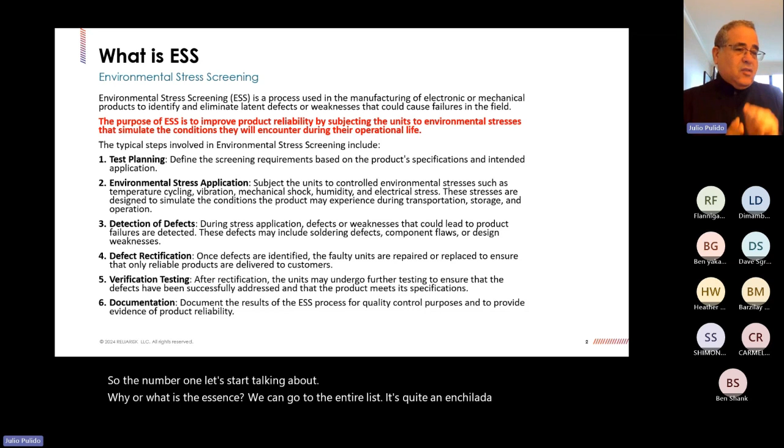So number one, let's start talking about why, or what is ESS. We can go through the entire list. It's quite an enchilada, it's 6 points. But the purpose of ESS is about improving product reliability. And why you do it, that's the main thing. You want to improve the product reliability.

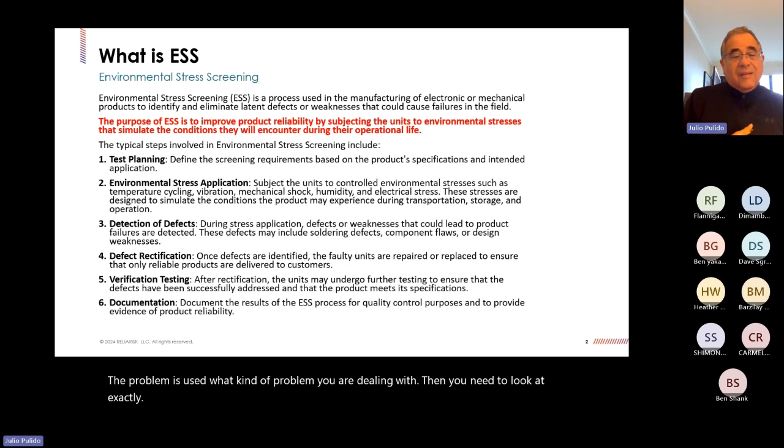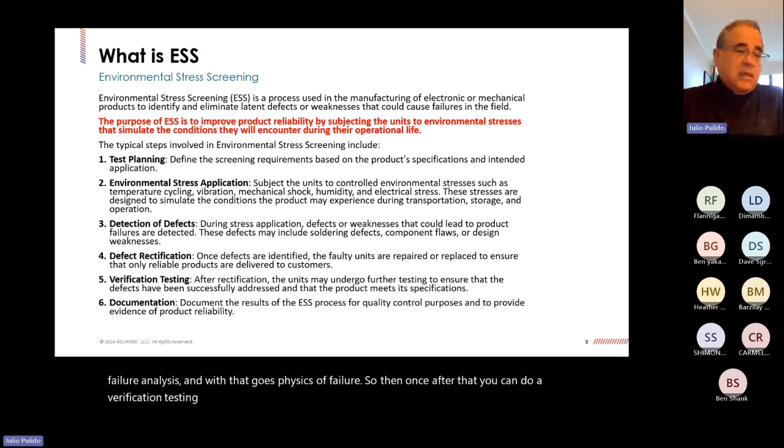So you will say, okay, reliability has to do with long term. That's correct. But it also affects you depending on how the product is used, what kind of product you are dealing with. Then you need to look at exactly if ESS is necessary for you or not. But it involves planning, environmental testing or applications, failure analysis, and with that goes physics of failure. Then after that, you can do verification testing, documentation, and traceability as part of quality assurance.

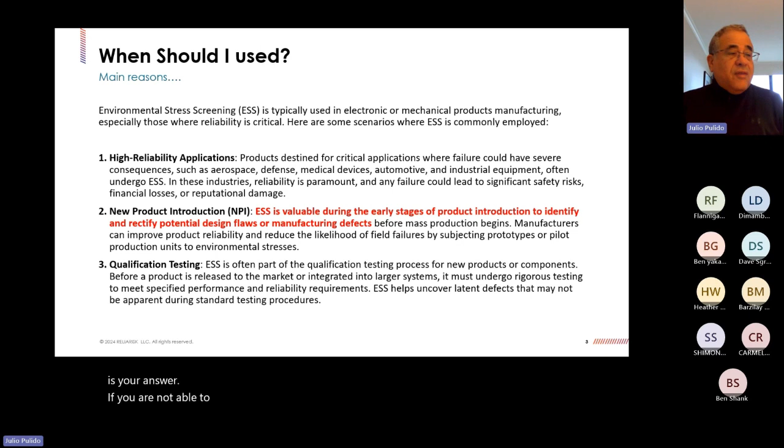And also other main reasons, right? What should we use it for? Why? So now that we know what ESS is, when should you use it, when is it really necessary? If you have high reliability applications from the get-go, or your industry requires a high level of performance in terms of low failure rate, this is your answer. If you are not able to eliminate all the failure mechanisms, or some failure mechanisms, and you cannot control it well in your process, that's why.

And it's part of the NPI, your new product introduction. It is really a good tool when you are going to market. Why? Because you demonstrate that your line, you understand what you want, what is your failure rate that you want at the beginning, and we can talk about it. But the important part is that you can assess that in a more quantifiable way.

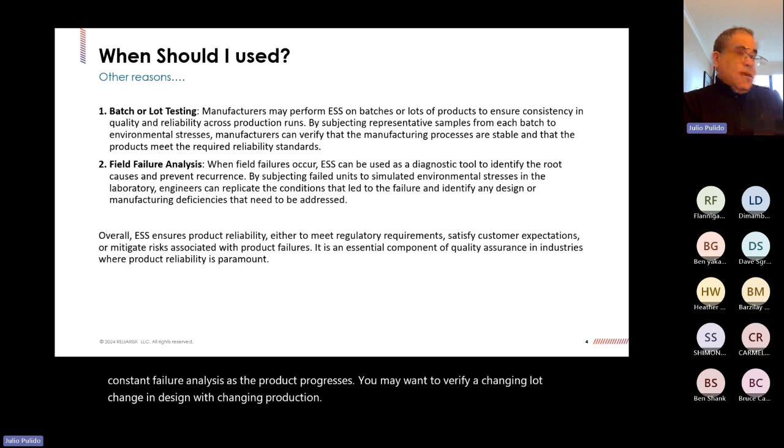Other reasons could be that you decide to test for batch. It could be that you're doing a constant failure analysis as the product progresses. You may want to verify a change in lot, change in design, or a change in production location. That's when you start doing that. So all these things is when you should do it, but at the end of the day, how you should do it is what we're gonna be talking about. Because the how will give you the ability to be effective and be able to quantify your risk in the long term.

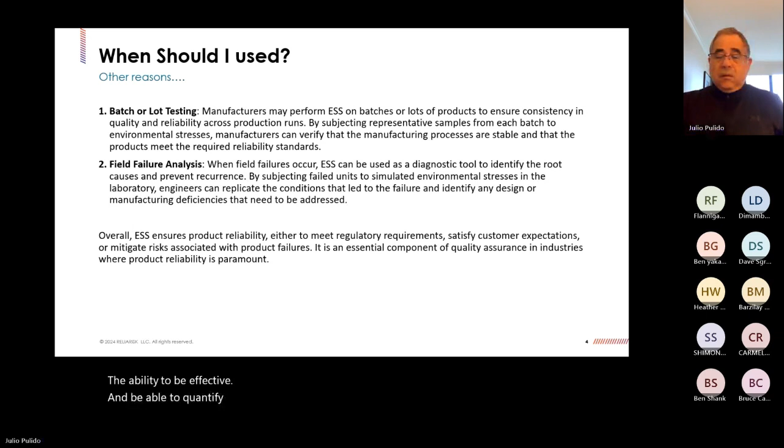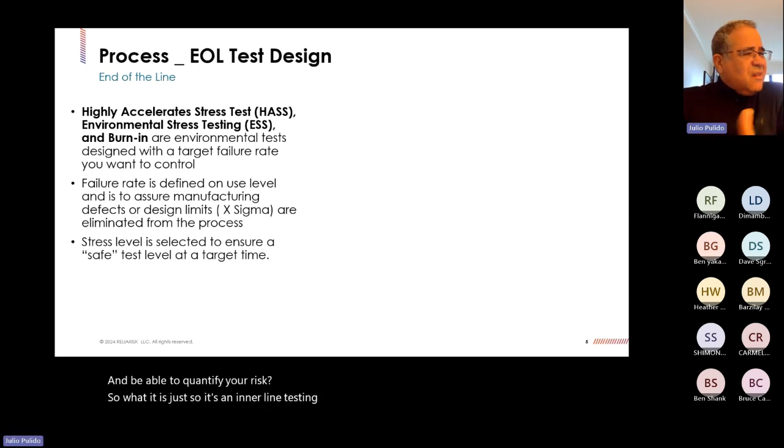So what it is, it's an end-of-line testing. ESS is kind of end-of-line testing, so people will think about it. So you notice I mentioned failure rate. Imagine you have a failure rate, you understand what that failure rate is. And by the way, ESS is just one more of the things people use. Burn-in, HASS, stress screening, all of them use the same methodologies with small variations. In some you have 2 or 3 factors coming into play, but it's almost the same principle. All of them are the same principle.

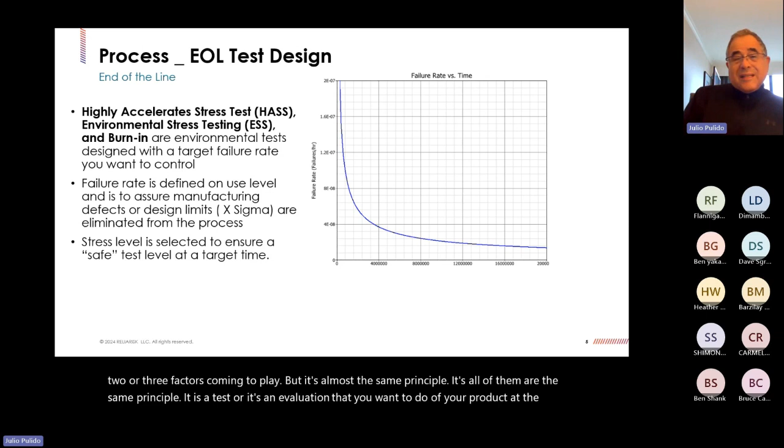It is a test or an evaluation that you want to do of your product at the component or system, subsystem level. Let me repeat that - at the component or system, subsystem level. And then you say, hey, I want to control this certain failure rate, and you have a failure rate over time, like something in this arena. And you decide that you want to control it at that level. There we go, that's the line.

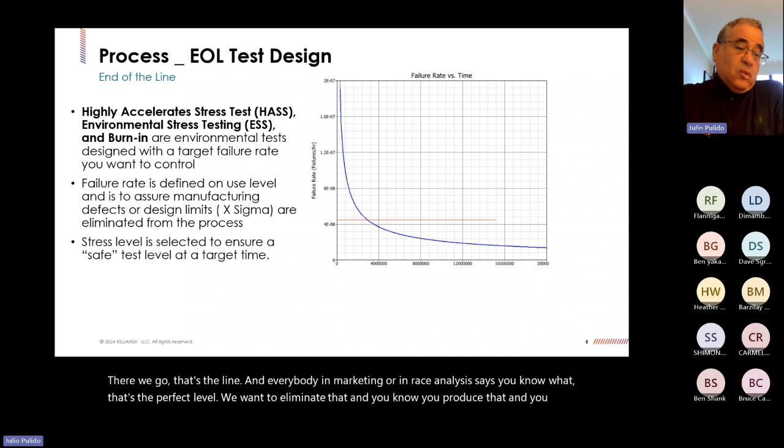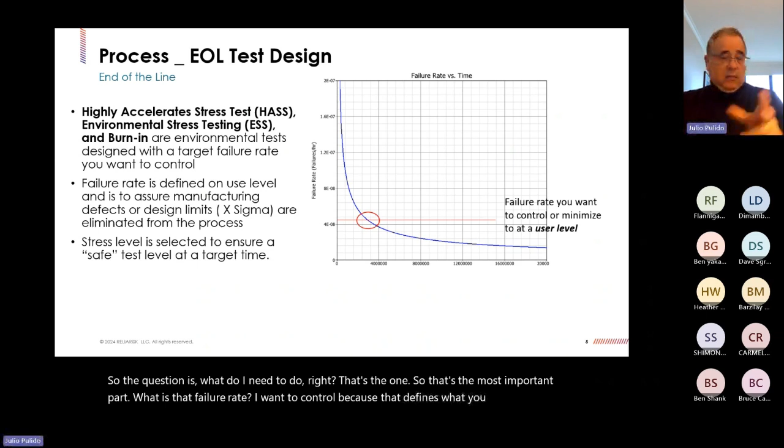And everybody in marketing or in risk analysis says, you know what, that's the perfect level, we want to eliminate that. And you know you produce that, and you know you need to eliminate it because you don't want customers to potentially get that. You want lower failure rates potentially in the field. So the question is, what do I need to do? That's the one, that's the most important part. What is that failure rate I want to control? Because that defines what you have. Or you can do that in different ways, and we're going to cover that in this conversation.

So in different terms, we talk about the whys, the what, and the how. So we need to talk now about the how, how you're gonna go about it. I need to reduce and eliminate and control that failure rate right there in our previous conversation. But how are you gonna do it?

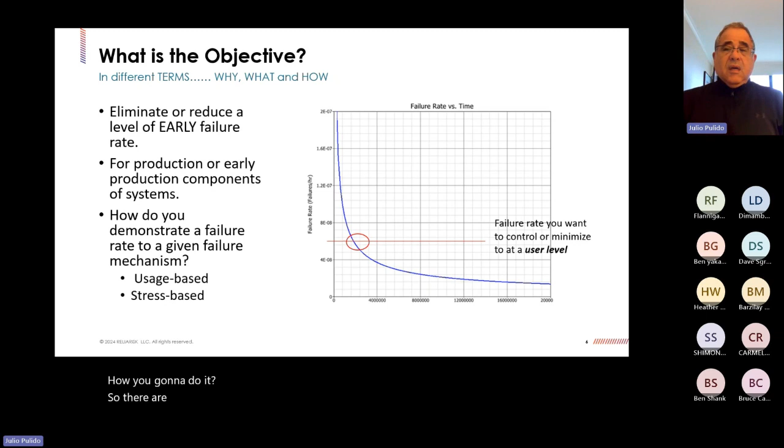So there are different ways to do it, quantitative ways or qualitative ways. Qualitative ways, I'm just gonna share this with you. It's not the subject of this conversation, but it could be someone saying, well, I'm looking for 300 degrees temperature.

We put it to test. Anything that fails on that, it's no good. We let it pass because we decided that in a room, and we thought, over the years I have experience, I have 50 years experience, God.

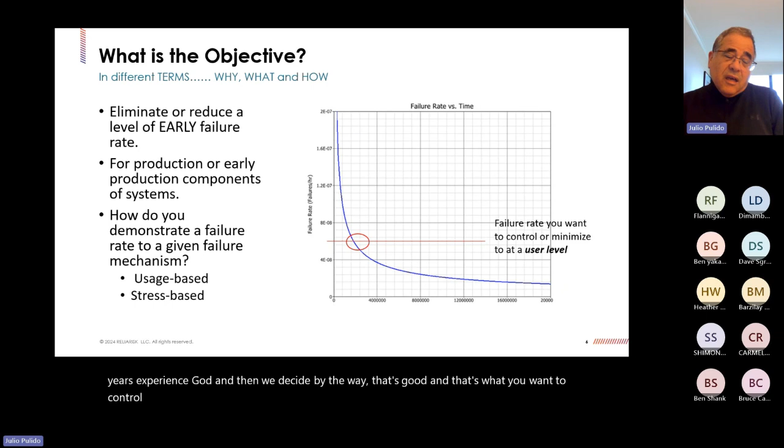And then we decide, by the way, that's good. And that's what you want to control. And that's okay if your organization is willing to do it. The only question with that, someone may ask you, what does that represent in the field?

You don't have the answer. Someone may ask you, how does that affect the performance of this component in the field? Well, we never had the problem, so we don't know. So that could be an answer, right? There are answers for everything. But that's not the right way to go.

The right way to go is you are able to determine, yes, I'm eliminating a certain percentage of the life, and we will cover that in today's presentation. But also at the same time, I know what is the stress level that I want to test, for how many cycles I should do that, and I know I'm catching something. I know I'm eliminating that high failure rate that we see from the beginning.

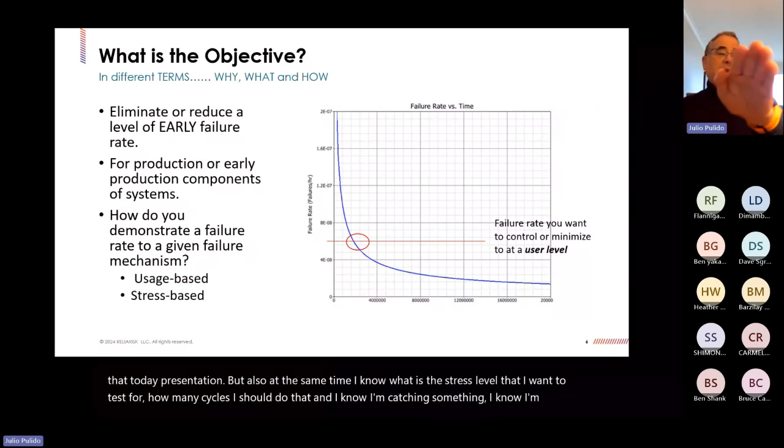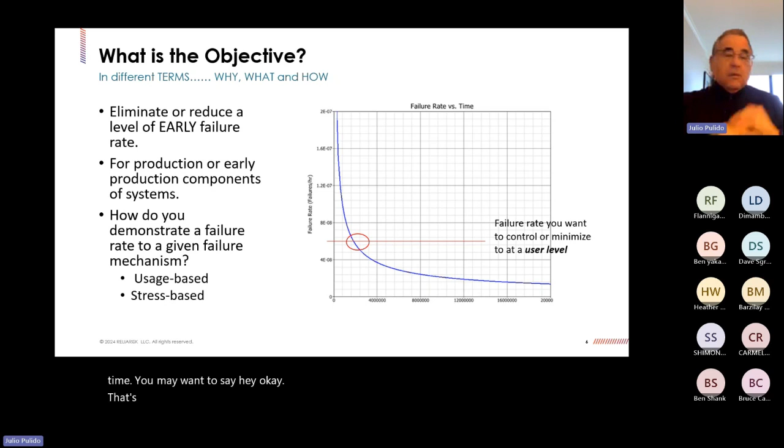And again, it's usually done when you want to eliminate high failure rates from the beginning. Imagine you have your failure rate inverse, and then you have a low and then increasing over time. You may want to say, hey, okay, that's okay. And then I can do it just to make sure that I am at that failure rate, again, right?

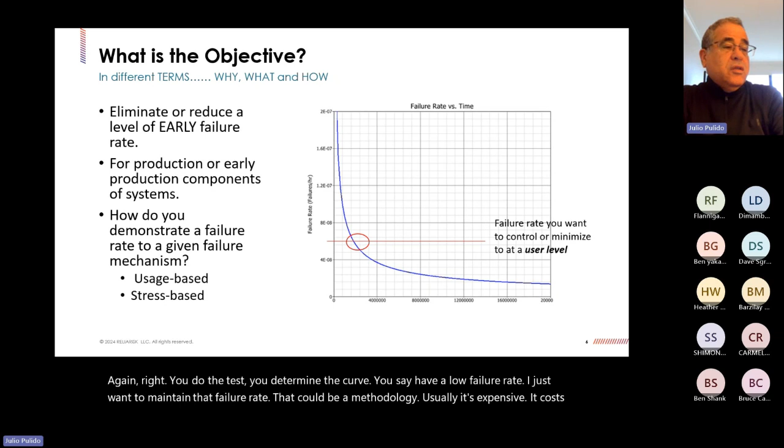You do the test, you determine the curve, you say I have a low failure rate, I just want to maintain that failure rate. That could be a methodology. Usually it's expensive, it costs, but for example in medical industry or pharmaceutical industry it may be important because you want to make sure that you have evidence that you did not produce something that is questionable.

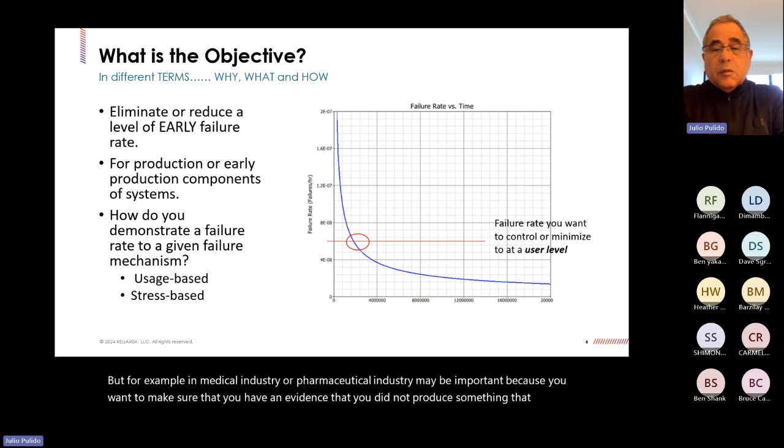So with that said, let's talk about reliability testing. Reliability demonstration starts by understanding how the product is used in the field. You can use standards, but standards don't tell you about reliability. They were designed by committees.

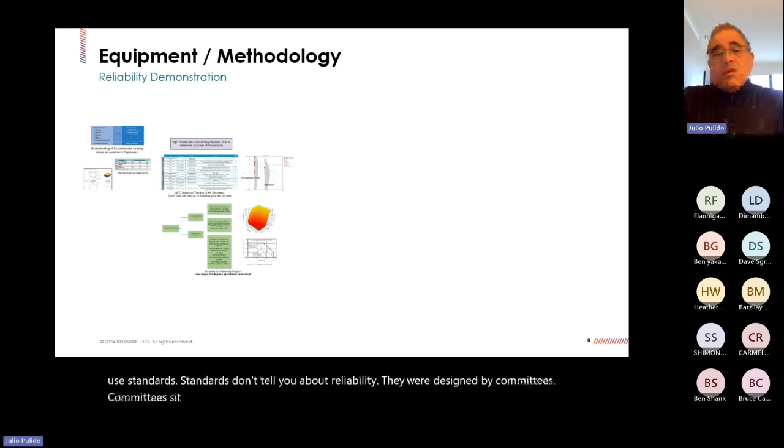Committees sit down in a room and say, well, based on our experience, X, Y, Z, tested to this, and that should be okay. There is more that goes into that committee generation, but in general it's usually between people that perform some kind of job in the area, understand the area, and given the experience, they are suggesting that. It's a good method, but it's not the method.

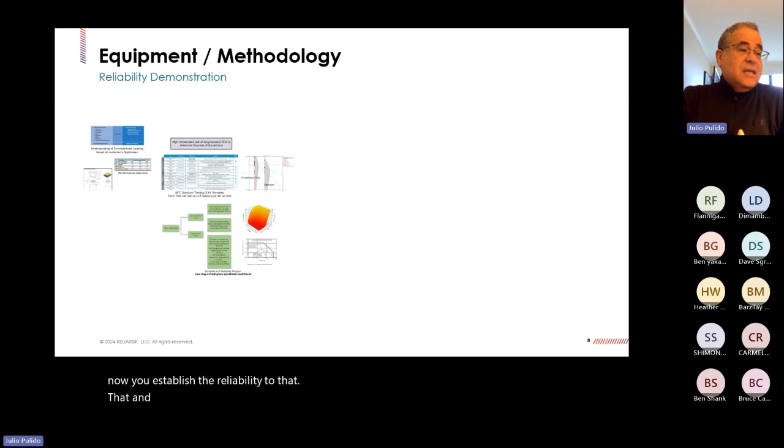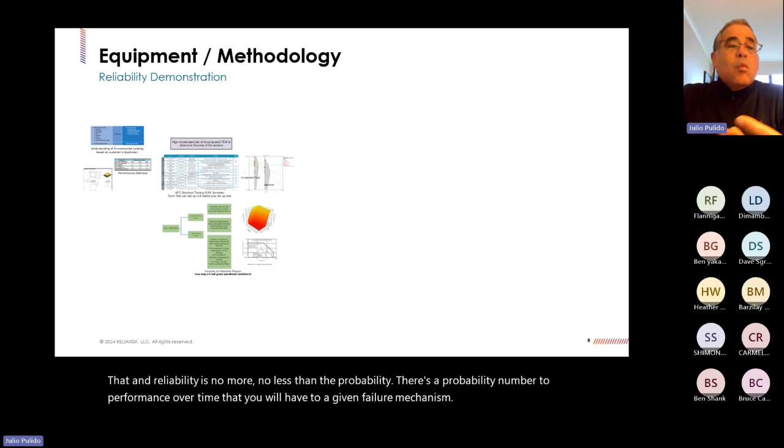Another one is you now understand your failure mechanisms, you understand how it's used in the field, and now you establish the reliability to that. Reliability is no more, no less than a probability number to performance over time that you will have to a given failure mechanism. What a probability that I will have a failure due to that failure mechanism.

So that's extremely important. And from that, you can use thermal chambers, right? You can control that. You can do it by controlling the thermal mass with chillers or not. You do check on vibration. You can combine with corrosion. You do a failure analysis.

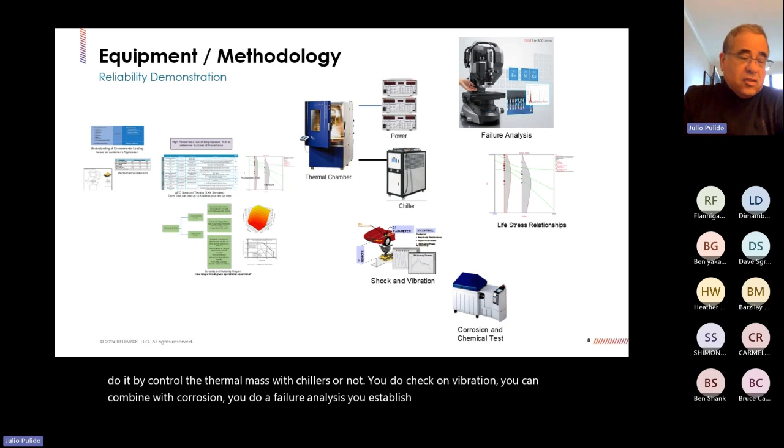You establish from those tests life stress relationships at every stress level or combination of stress levels. And then from there, you establish a probability of occurrence that helps you to understand. That's in summary, that's in general what is called reliability testing.

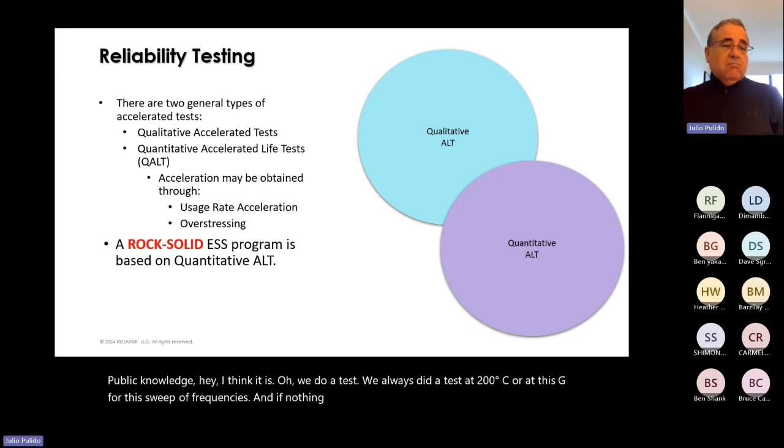So in reality, you have two elements: qualitative and quantitative. So you have both of them in what it means. Qualitative is based on public knowledge - hey, I think it is, oh we do a test, we always did a test at 200 degrees C or at this G for this sweep of frequencies, and if nothing happens, it will be good. You can take that avenue, but is that the avenue?

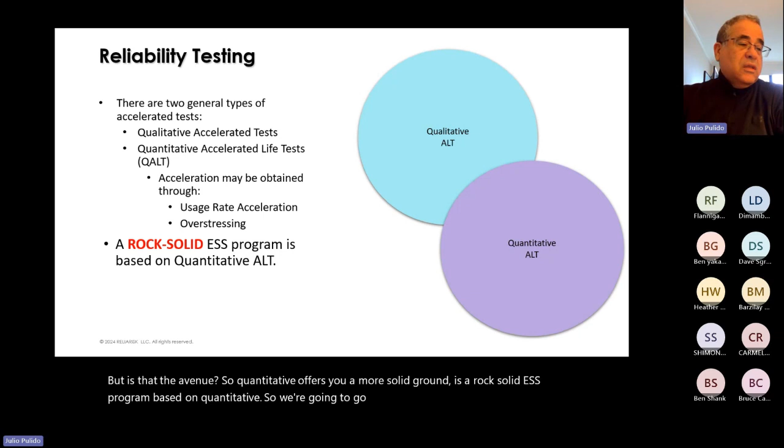So quantitative offers you a more solid ground. It's a rock solid ESS program based on quantitative. So we're gonna go over how you get to that quantitative part. There are two types of studies done when you talk about reliability. One is based on what is called usage rate acceleration.

So imagine you have a dryer or a washer, and every cycle, the person used the wash 10 times in a week. So 10 hours a week, and that means it's X amount of hours a month, a week, and possible. You can say, okay, if I keep cycling that, it will get to my life. So I just look at a given life. I need to assure that at least it can do that, right? That could be one way.

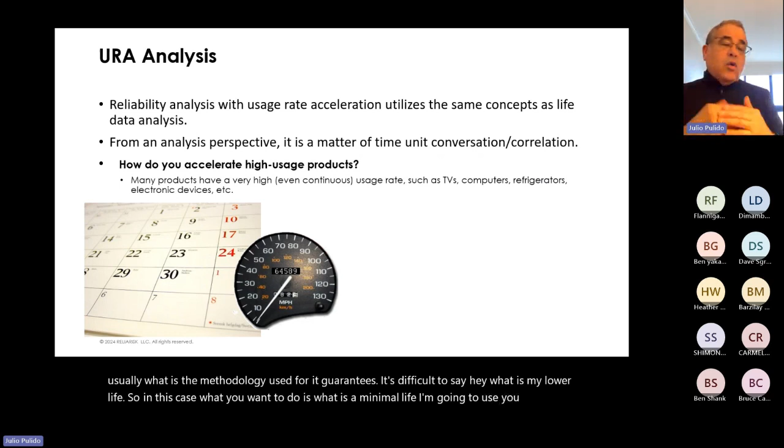The only problem with that is the issue here is that many products have a lot of products at system level, which is usually what the methodology is used for. It guarantees - it's difficult to say, hey, what is my lower life? So in this case, what you want to do is what is my minimum life? I know that historically during the reliability testing and validation of the different systems, you have failures on that occurrence. You have that combined failure history.

So now you say, okay, I know I have these failures at the beginning, and I know that after a certain number, it should be okay based on the test that we did. So you go ahead and you say, okay, I leave this unit operating for X amount of time. You can let it go like that.

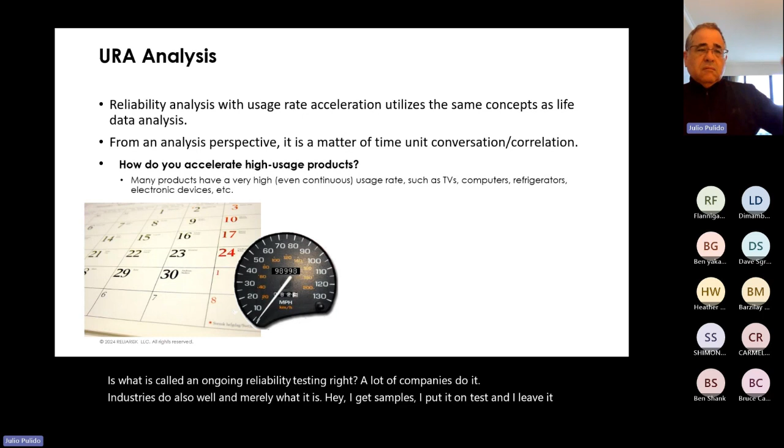Another technique could be what is called ongoing reliability testing. A lot of companies, industries do it also. Mainly what it is, hey, I take samples, I put it on test, and I leave it there. And they keep going, they keep accumulating life as they go through all these cycles. The only criteria here is that you need to make sure those cycles are representative of the operation.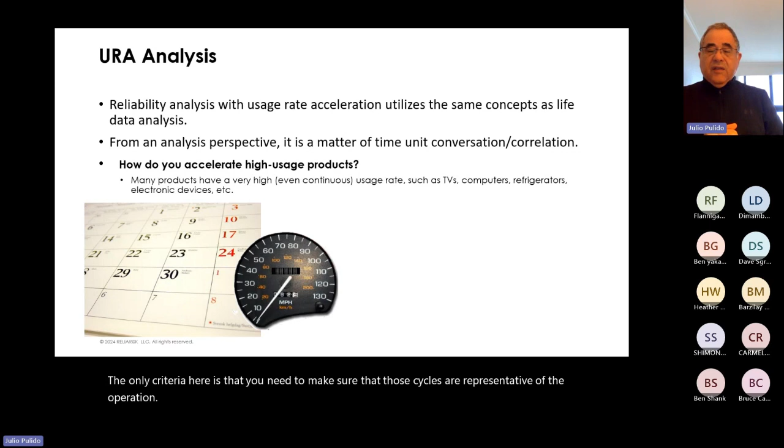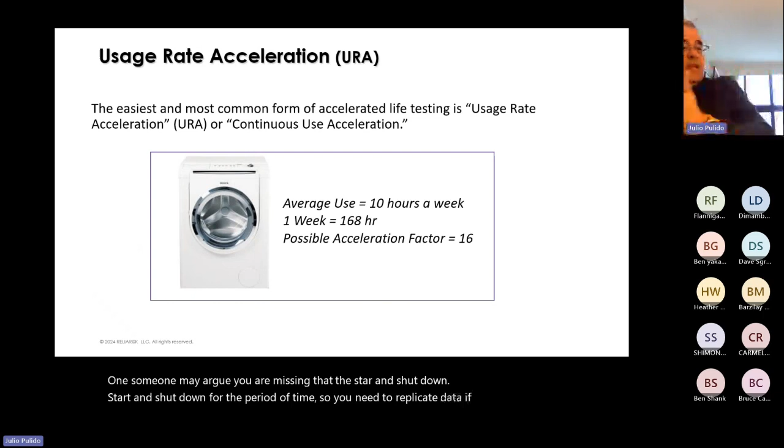So maybe I'll give you an example. Let me go back to that washer. If you keep running that washer constantly, what are you missing? Well, someone may argue you are missing the start and shut down for a period of time. So you need to replicate that event. If you run that constantly, you may get a failure mechanism that is not representative of the actual cycling test, because that unit cycles on time. So those are the things that you need to pay attention to.

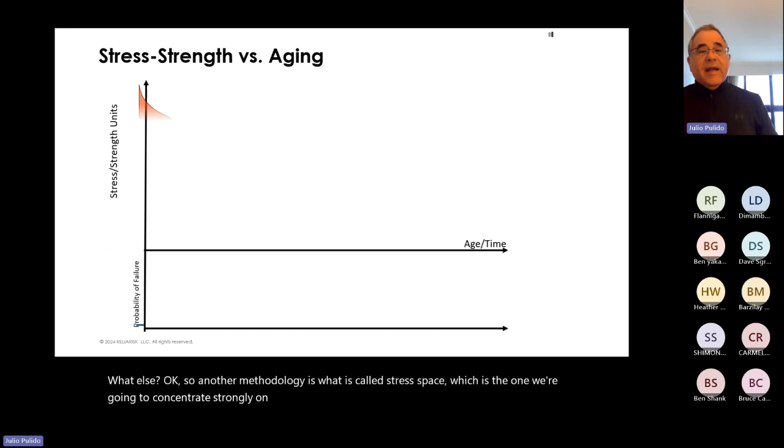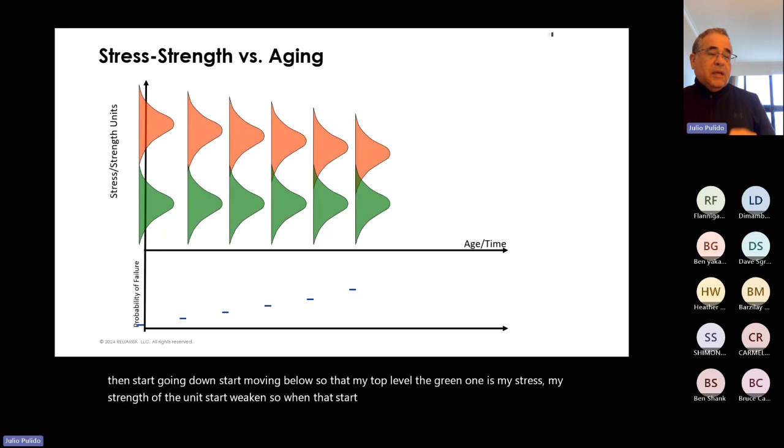So what else? Okay, so another methodology is what is called stress-strength, which is the one we're going to concentrate strongly on this presentation. What I have here is, over time, you can see as my stress degrades, my strength degrades, and then it starts going down. It starts moving below, so that my top level, the green one is my stress, my strength of the unit starts weaken. So when that starts weaken, my probability of occurrence, my stress versus my strength, starts getting under the area. You notice that. And when you go, it automatically generates for you a probability of failure.

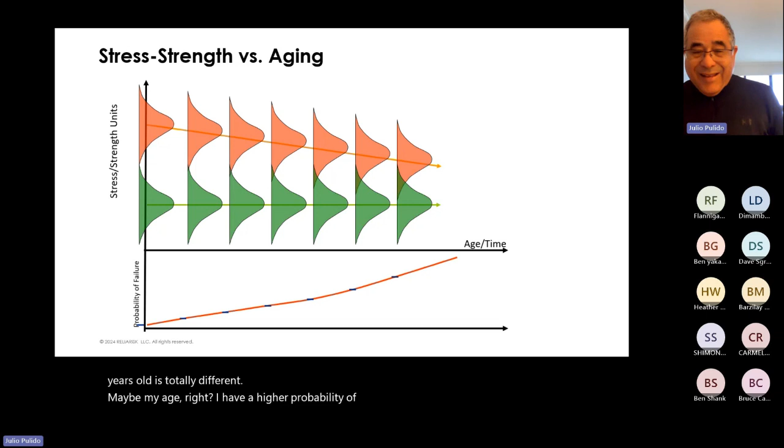So the longer I use a product, the more prone it is to fail because of degradation. It's about life - the longer you go in life, what is the probability? The probability of you having to die at 20 years old is totally different than at maybe my age. I have a higher probability of dying than a person that is at 30 - hope not, in this presentation by the way - but mainly that's what we're looking for here. So how that degrades over time.

So the objective of increasing stress in an ALT is mainly what I'm going to show you here. I'm increasing that stress over stress, right? Instead of reducing my strength, I'm increasing the stress. If you notice in here, I'm doing the opposite, but it has the same effect. And that is the concept of the ALT. What it does is, hey, I'm increasing my stress, and with that, I'm driving the degradation.

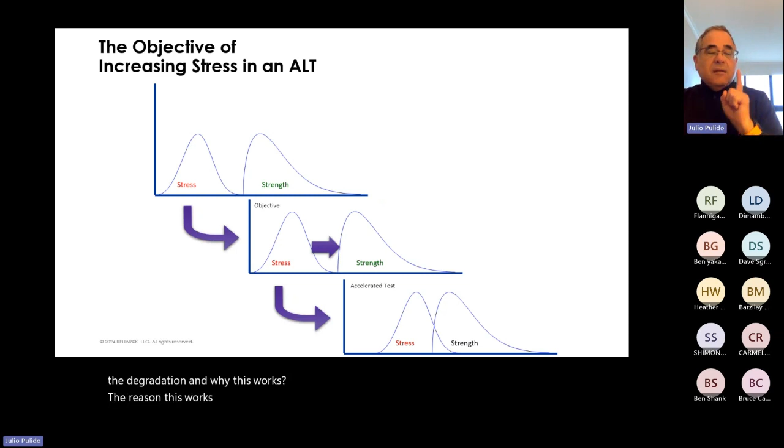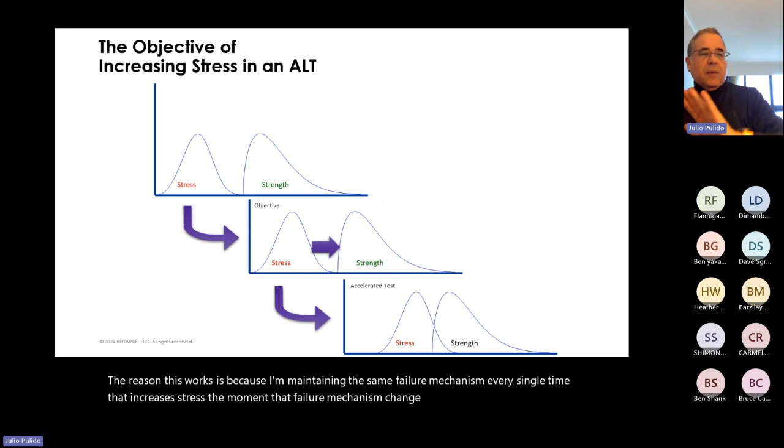And why does this work? The reason this works is because I'm maintaining the same failure mechanism every single time that I increase the stress. The moment that failure mechanism changes, that means it stops - you should not increase your stress more at that point. So one nugget that you need to take with you here is you can increase your stresses, but the moment your stresses change your failure mechanism, that means you stop. That is no longer the life that you're looking at.

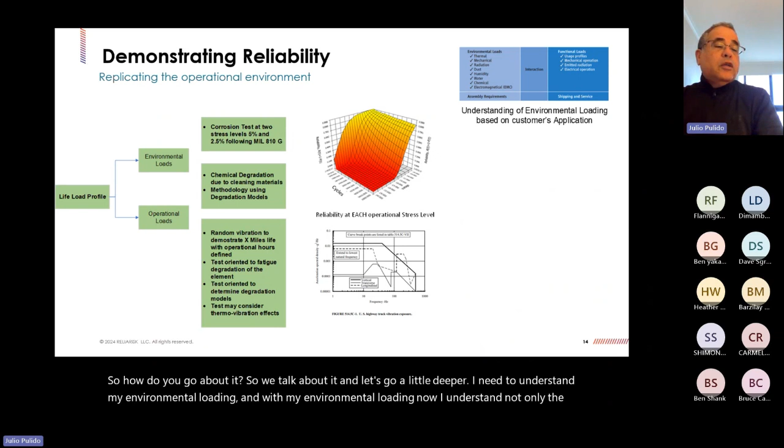So how do you go about it? Let's go a little deeper. I need to understand my environmental loading, and with that I understand not only the environmental loads I apply, but my operational loads. So I look at my customers, how they use it, and all that.

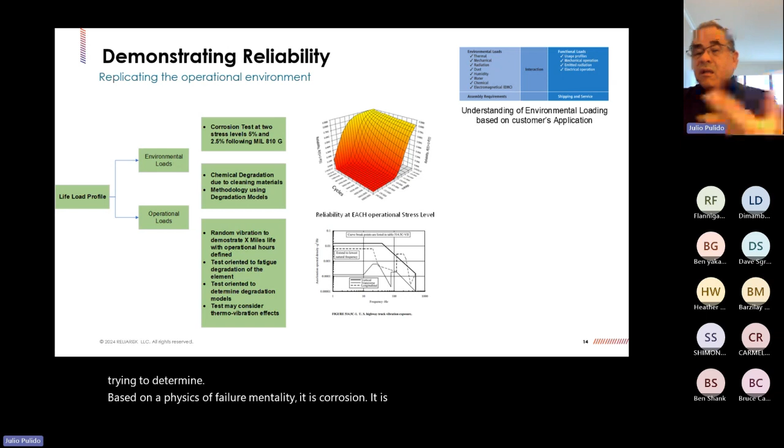Based on that, I develop what is called my reliability calculations, and I'm trying to determine based on a physics of failure mentality - is it corrosion, is it fatigue, thermal fatigue, or mechanical fatigue? They have different variations - creep, fatigue, what percentage is each.

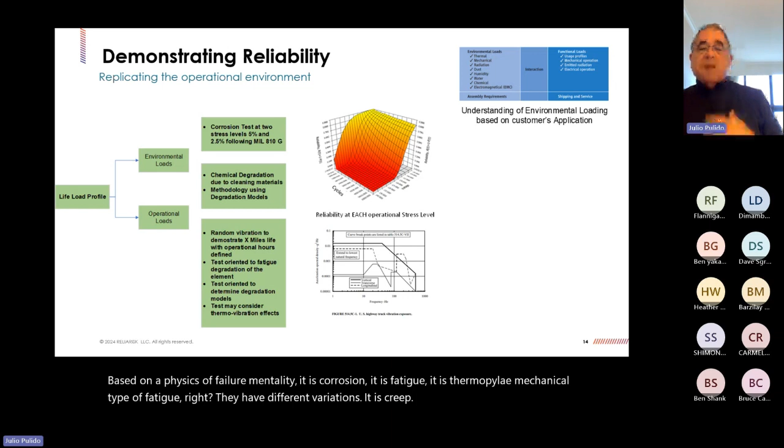Those are the things. And then based on that, I customize - I allow them to drag that degradation over time so I can calculate it properly.

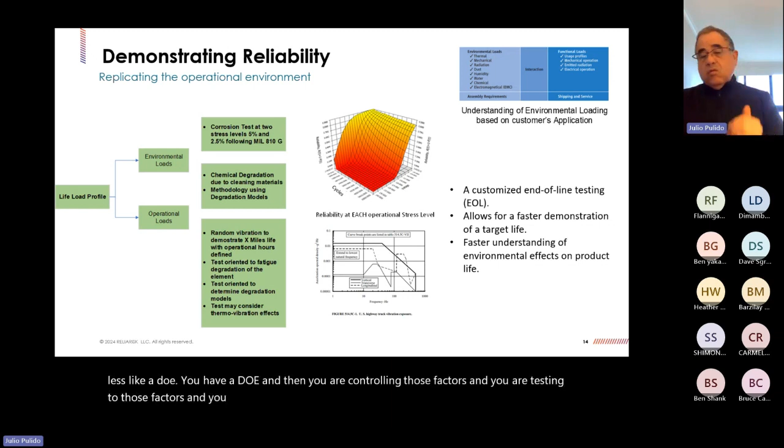It's more or less like a DOE. You have a DOE, and you are controlling those factors, testing to those factors, and making sure you determine if that factor is relevant - that's a failure mechanism I want to deal with.

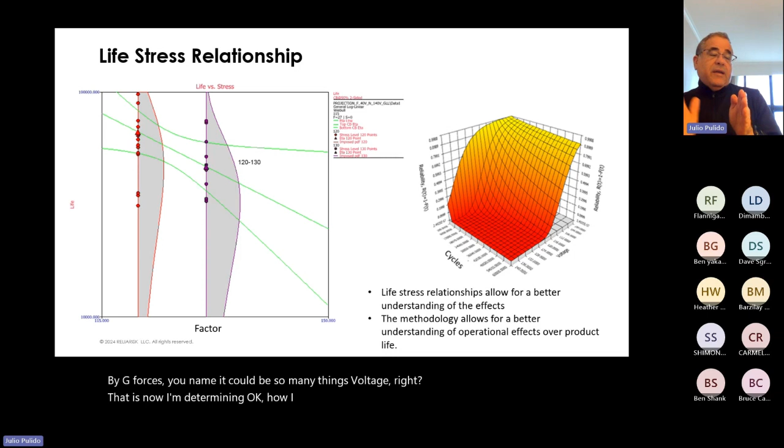At the end of the day, you come with a solution like a life-stress relationship, where for my factors I have all my stress levels - temperature, humidity, G forces, you name it. Could be so many things, voltage, right? That's how I determine - the higher I go to the right, the lower is my life. That's where you go.

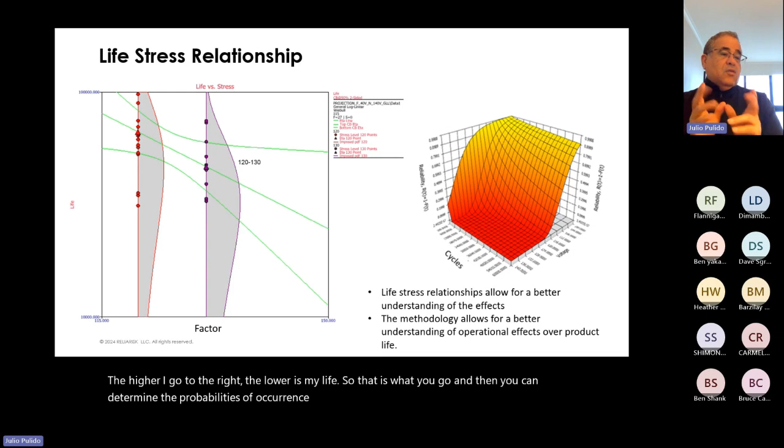And then you can determine the probabilities of occurrence. Why is this important? Because this is the basics that's going to help you design your ESS. Once you establish this function based on your reliability testing at different stress levels, you can use the same information - it's about knowledge management - to design your ESS.

So imagine I am at the end of my test. I did a test with 20 samples and 40 samples at different stress levels in temperature, for example. I get these responses here. Now I can calculate what will be my life to the right. You can see that perfectly - it usually goes from the left to the right.

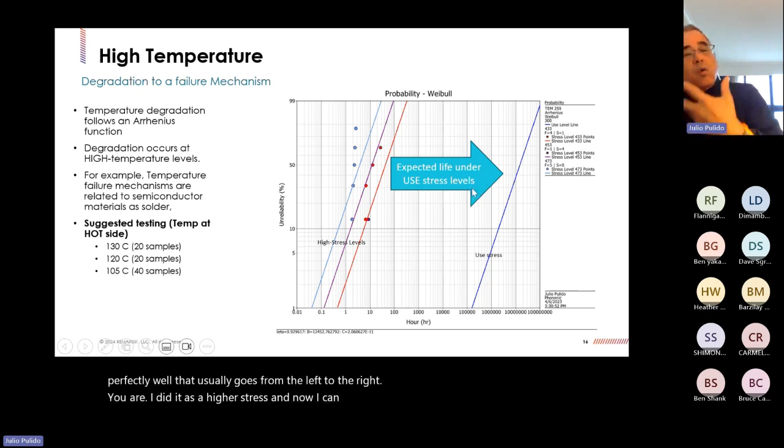I did it at a higher stress, and now I can determine what will be the projection, what will be the life of the product. The other way around, you use the same information and come from the right to the left, and say, okay, what stress level can I go higher? Do I maintain my same failure mechanism? And now I can use that to determine a shorter life.

Each one of these will have a failure rate, a curve that increases failure rate as you go to the left. So if I decide I have one more stress level I want to explore to use for ESS or any other type of burn-in, I just move, do the test, evaluate it, and generate that function, then use it.

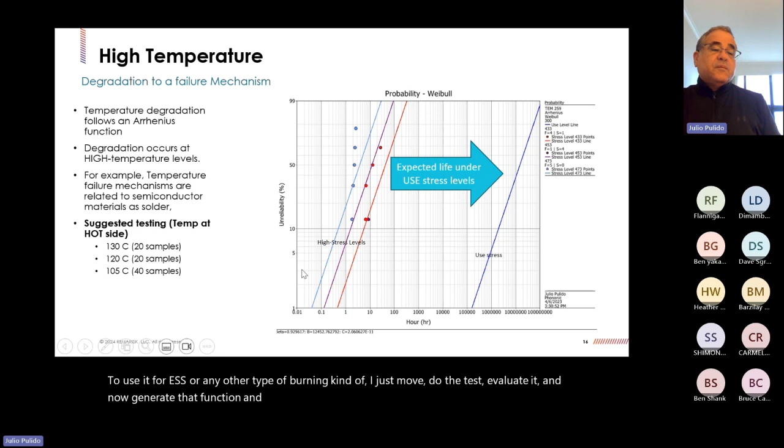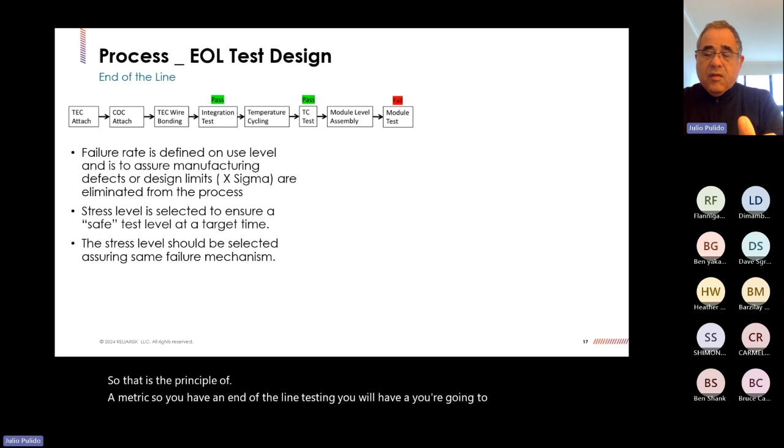So that is the principle of a metric ESS. You have an end of line testing. You do it for all your products, and you say, okay, I want to design an ESS.

So first, what is my failure rate? Then I determine that - you can see the line there, the red one. That's what I want to get, so that is my target failure rate that I want to demonstrate. And where is that failure rate? That's your actual use failure rate in the field, because that's the failure rate associated with your warranties. You want to make sure you don't have a higher occurrence of failure from that point to the left.

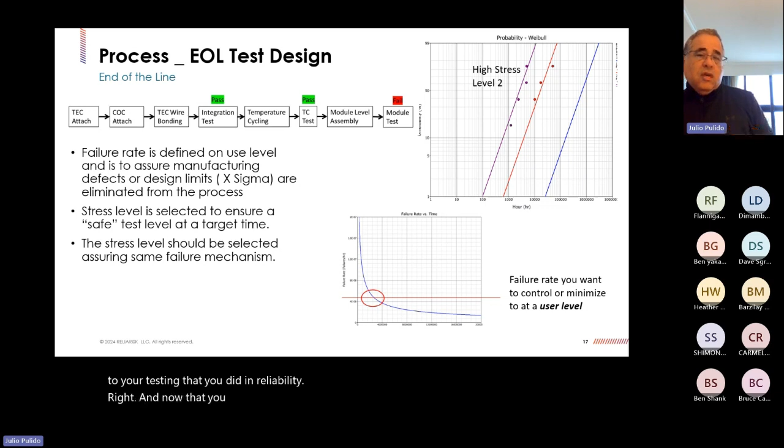So then you go back to your reliability testing, and now you know you have that use function. You know you did high stress level 2, high stress level 1, and then you determine your use level. The function we have down lower is the user level failure rate, and you know that relates to that specific user level. Okay, what is that point?

That point is X amount of cycles or hours. So you get that number of cycles, you place it on the use level function, you establish a line, and now you can go back at any stress level and it will tell you how many cycles you need to test for that given stress.

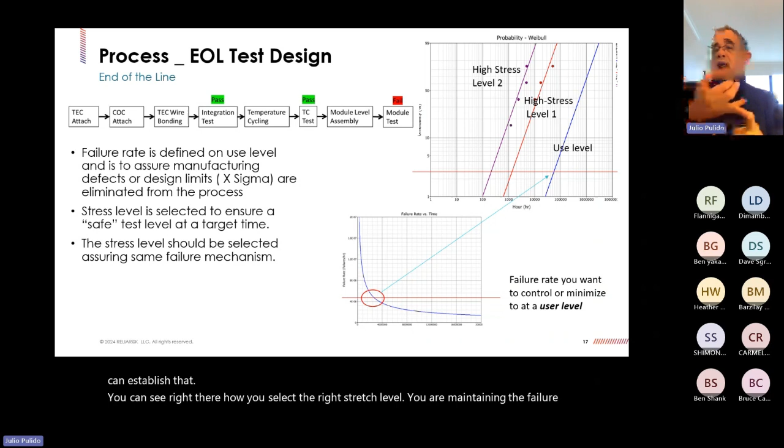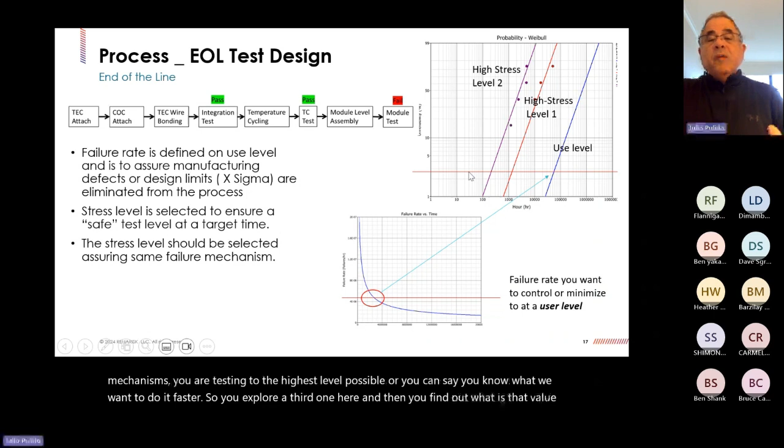So now you can see how you establish that, how you select the right stress level. You are maintaining the failure mechanisms while testing to the highest stress level possible. Or you can say, we want to do it faster, so you explore a third option, and find out what that value is - maybe 10 hours, 5 hours, 24 hours - and then you go back and execute based on that.

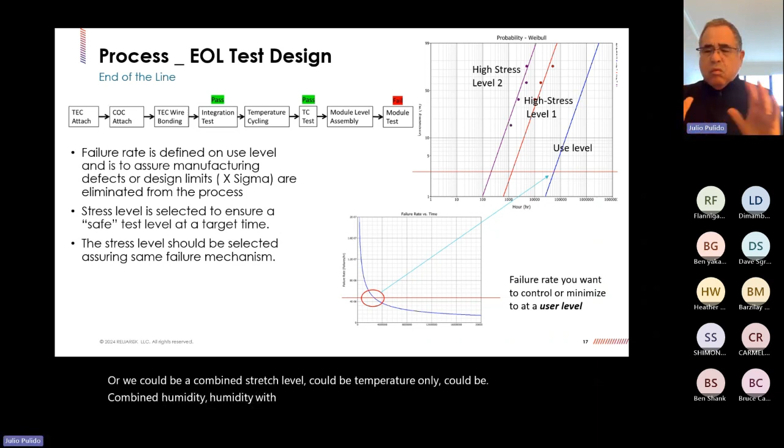Now, those stress levels could be a simple stress level, or a combined stress level - temperature only, or combined humidity with temperature, though that's complicated with the chambers. Usually it's temperature and vibration; those are the two common ones. But it could be so many things, and I'll give you an example about adhesion. I chose that specifically to show you it could be anything you want to use and control on your manufacturing floor.

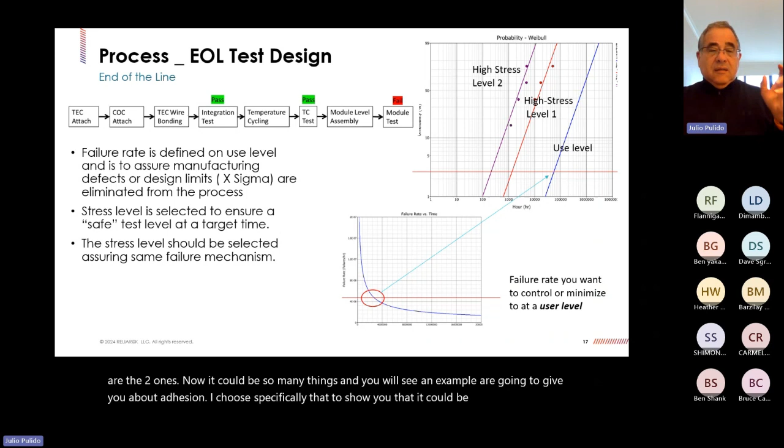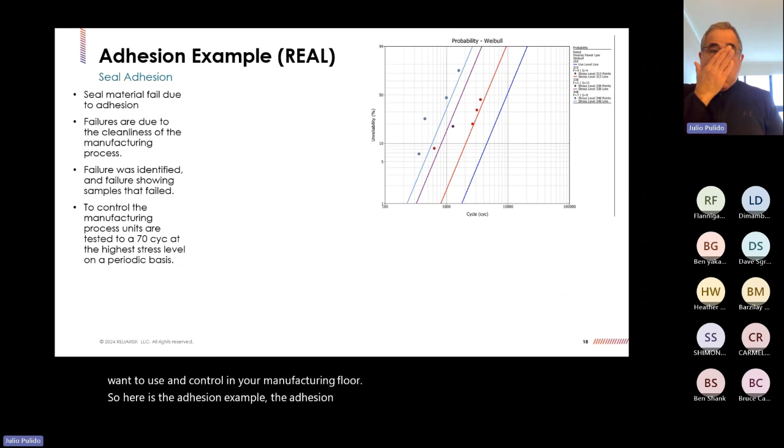So here is the adhesion example. This is more or less the test I did - those are my functions, these are test points, and you can see them. Notice the blue line to the right - that's what I'm pointing out to you. That's my user level, calculated.

But this was stress level 1, the red one. Sorry, where is my cursor? Yeah, there we go. So this is stress level 1, this is stress level 2, the purple, and stress level 3 is the bluish one to the left. You notice the red one, right?

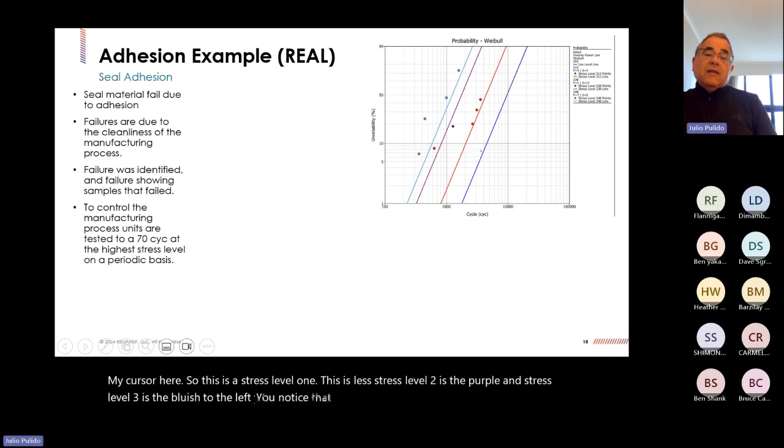You can see there, those points - it's kind of off, there is one off. So we have an early failure and then the other ones. So we have what is called infant mortality failure, right? That's what you want to eliminate. That's what people call infant mortality failure - exactly the ones you want to eliminate in this case.

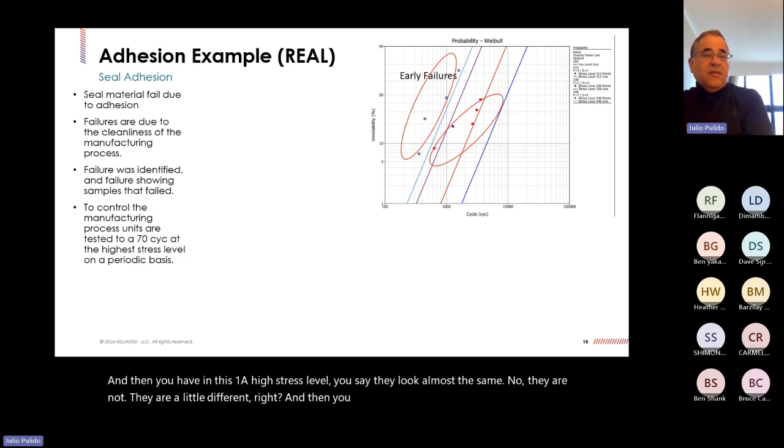And then in this one, a high stress level - you say, well, they look almost the same. No, they are not, they are a little different. And you see how different they are because of early failures or infant mortality failures. When you look at that same group of data, take a look at how different it is. And by the way, this just takes you, believe it or not, one more step to identify exactly what the point is.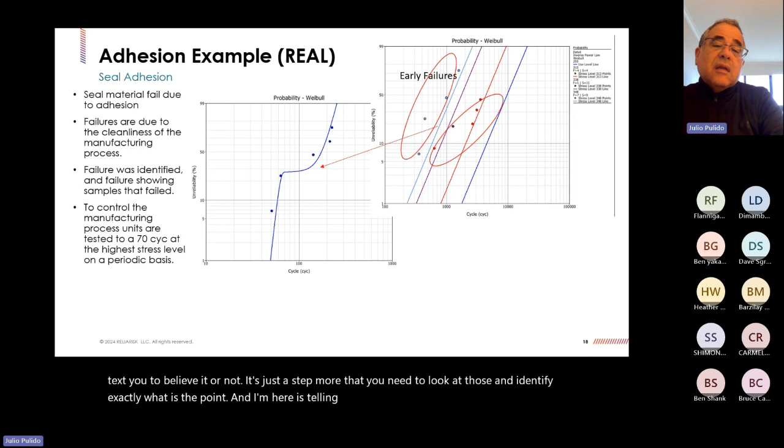And this is telling me, at that stress level, it takes 100 cycles, or maybe 150 cycles, let's assume right there in the middle, for me to deal with that. By doing that, I'm eliminating - I know that at that stress level, 150 cycles, whatever fails there will be infant mortality. Whatever passes, it's great, I can let it go. So I can do that at that stress level.

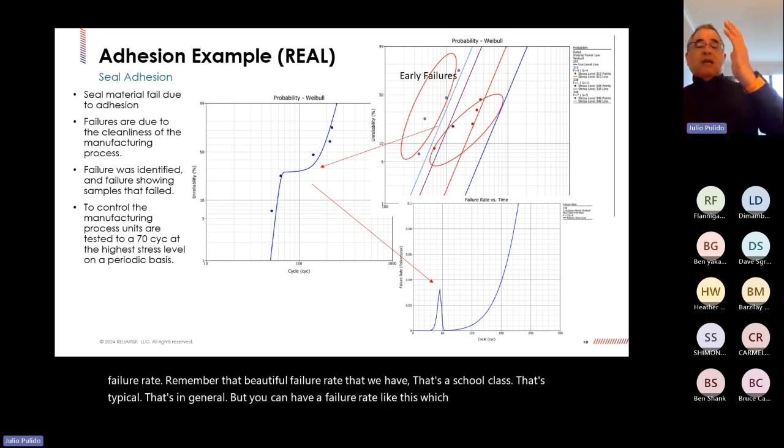Once I identify those, take a look - that's the failure rate. Remember that beautiful failure rate we have? That's a school class, that's typical, that's in general. But you can have a failure rate like this, which has the infant mortality - once they move out, it's a normal failure rate.

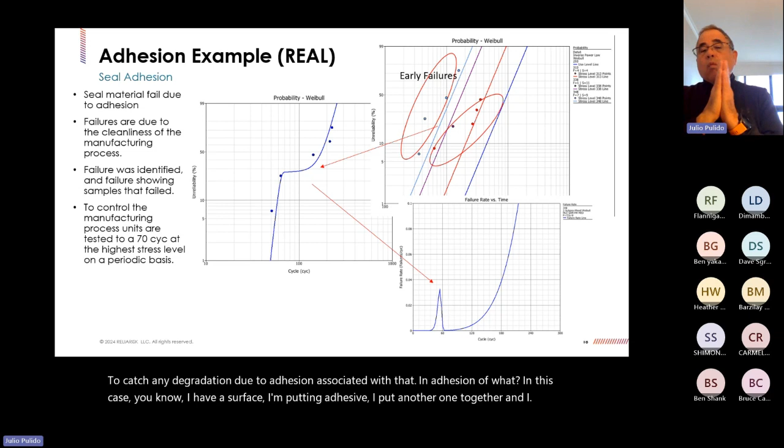So I can come back and say, okay, now if I calculate it this way, I can design my ESS to catch any degradation due to adhesion associated with that. In this case, I have a surface, I'm putting adhesive, I put another one together, to block water ingress. Simple like that.

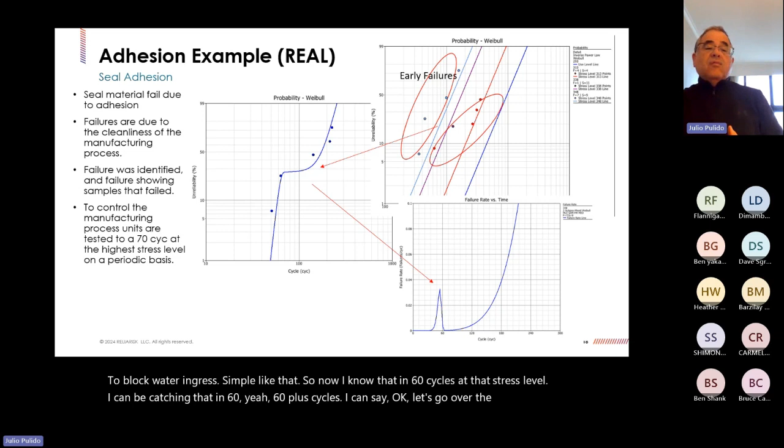So now I know that in 60 cycles at that stress level, I can be catching that in 60 plus cycles. I can say, okay, let's go over the 100 cycles where I start moving to the right, figure out what is the right level, and then you design it, optimize it for that level. That is the advantage of this methodology, because now you are quantifying your real risk, identifying what is the stress level that you need to be using for a given failure mechanism that you want to control and eliminate out of your production.

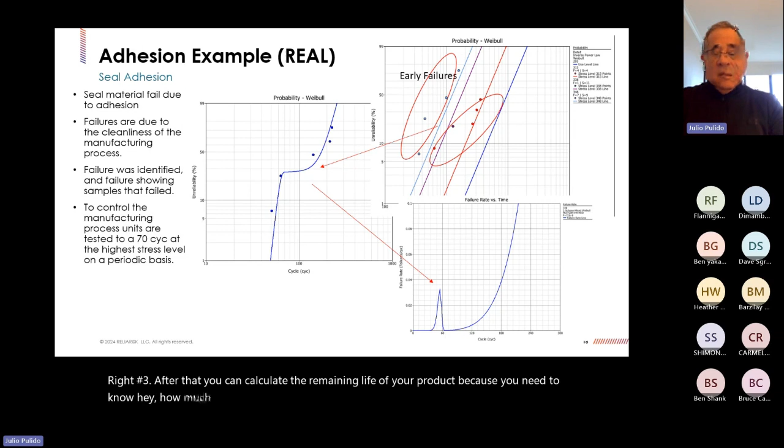Number three, after that, you can calculate the remaining life of your product because you need to know how much is the remaining life of that. And third, now you know that the products that pass that test will not have that. It will show the normal degradation. So that in conclusion,

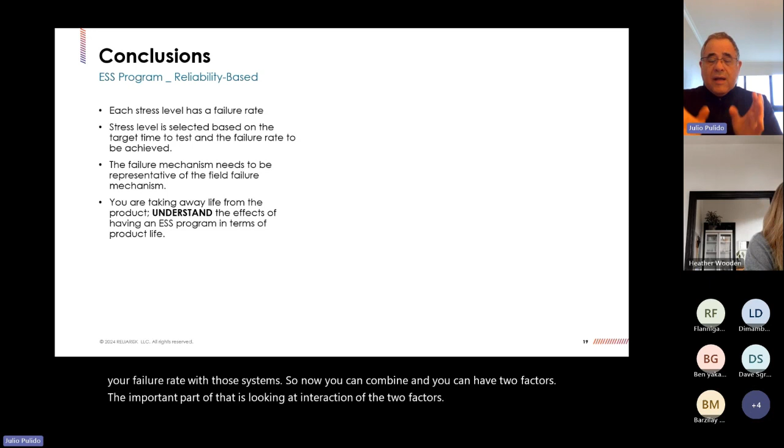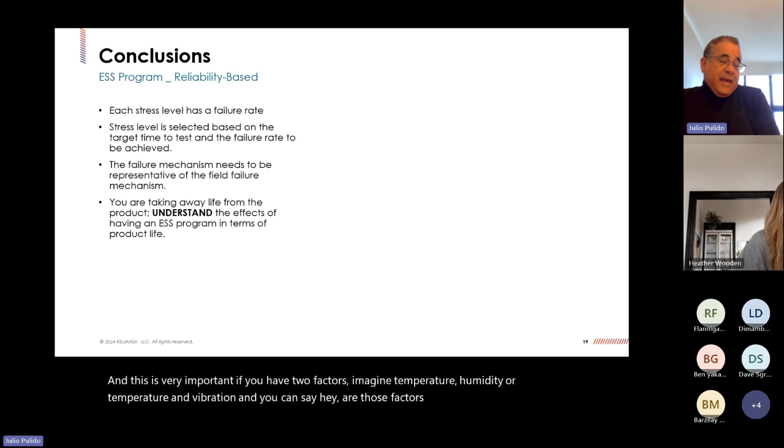And this is very important. If you have two factors, imagine temperature and humidity or temperature and vibration. And you can say, hey, are those factors working in my favor or against me? You need to do a DOE. A DOE can tell you those two factors are affecting me at the same time because of the interaction between them. So in those cases, it makes sense for you to use both.

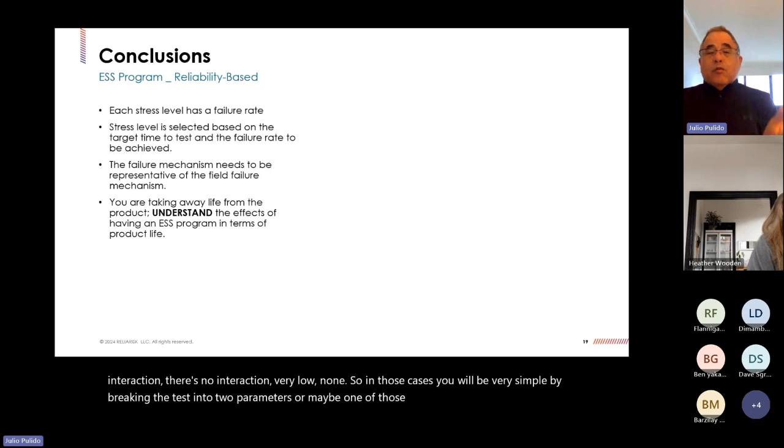But it could be that both of them are independent. They don't affect each other. There's no interaction, very low, none. So in those cases, you will be very simple by breaking the test into two parameters. Or maybe one of those is the most critical that drives really your failure mechanism. Those are the things that you need to look into.

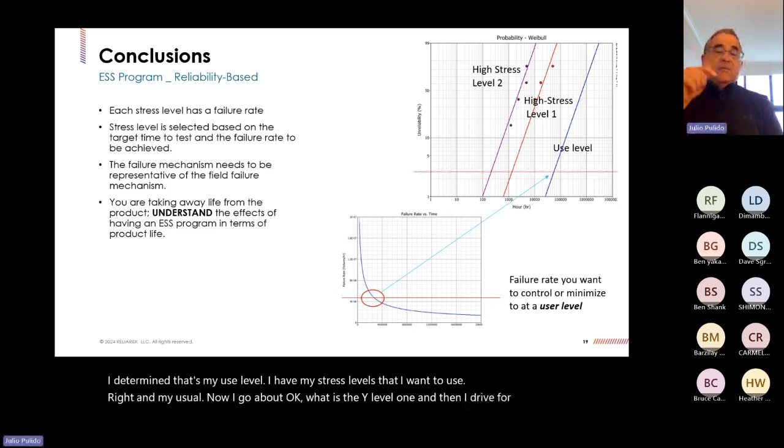The stress level is selected. Once you select the stress level, I have a target. I determine that's my use level. I have my stress levels that I want to use, and my use level. Now I go about, okay, what is the right level I want? And then I drive for that. And now I determine with whatever stress level I want, I can determine the number of cycles, hours that I need to do in environmental stress.

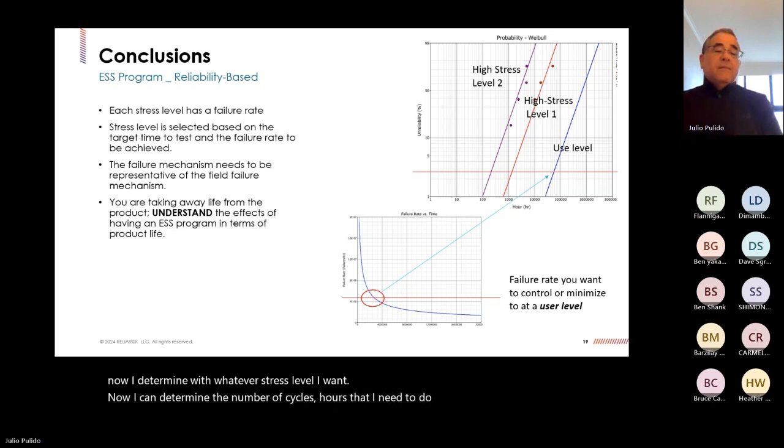The most important, there are two important things. One, that you are addressing the failure mechanism, because if any one of these curves has a different failure mechanism, that's where everything goes wrong. So you need to make sure failure mechanisms are the same.

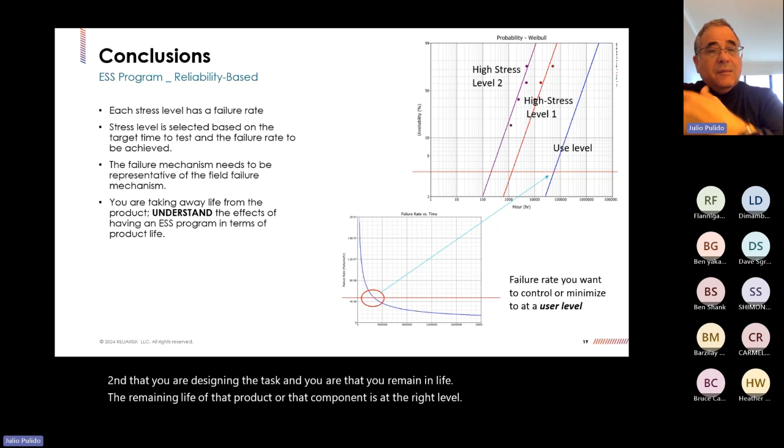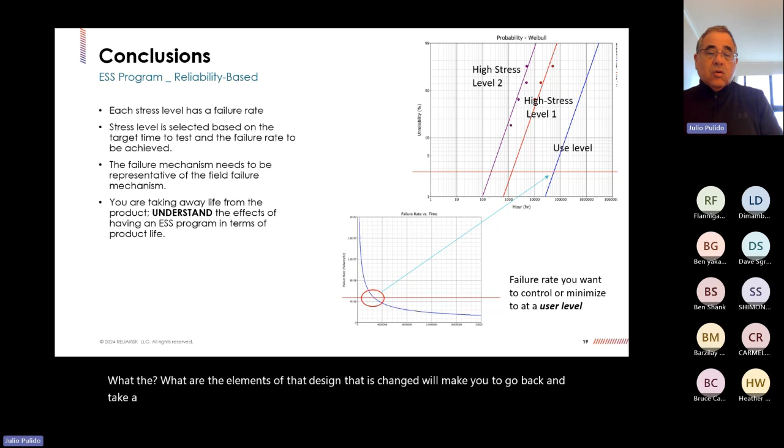Second, that you are designing the test and that your remaining life, the remaining life of that product or that component is at the right level that your customers are expecting. And the third, you need to make sure that all this you build the knowledge over time. So the organization understands why it was selected, why it is designed like that. And you need to also understand in that process what are the elements of that design that if changed will make you go back and take a look at these curves and making sure that they are correct or they are not affected.